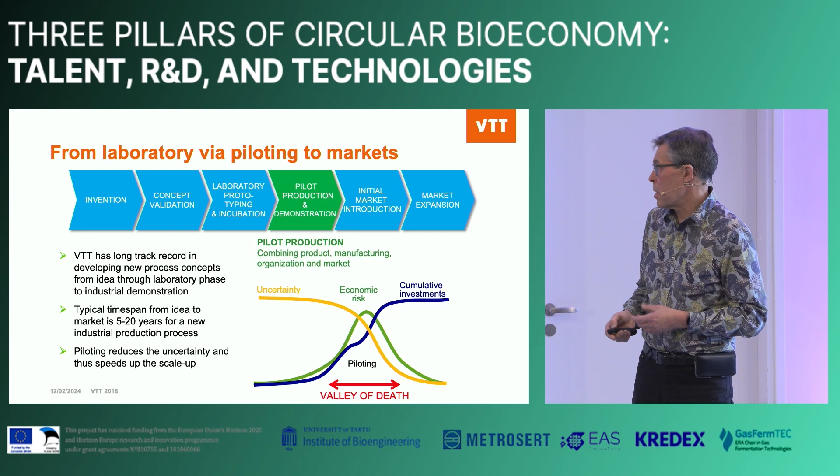First, I'm talking about gasification-based processes. Just to give you a short idea about gasification, it's combustion in understoichiometric air. So we put in air, steam or oxygen, and the aim is to have a gas that contains carbon monoxide and hydrogen, which can then be used for synthesis or gas combustion in engines or turbines for energy production, but quite recently for chemicals. That's shortly about gasification.

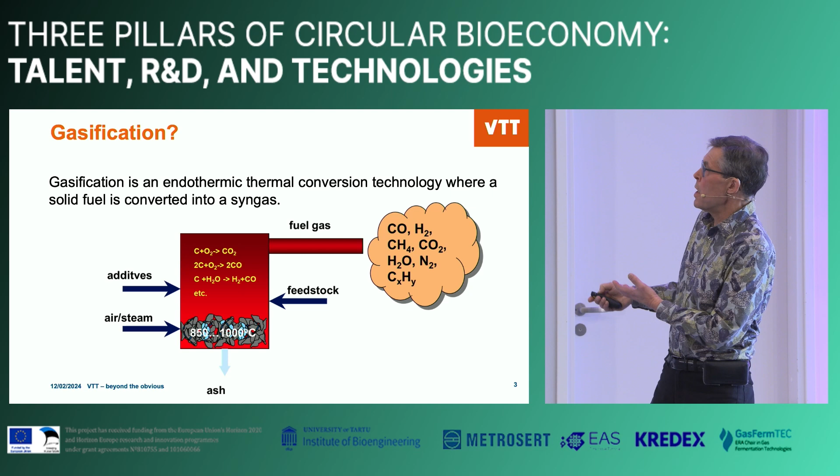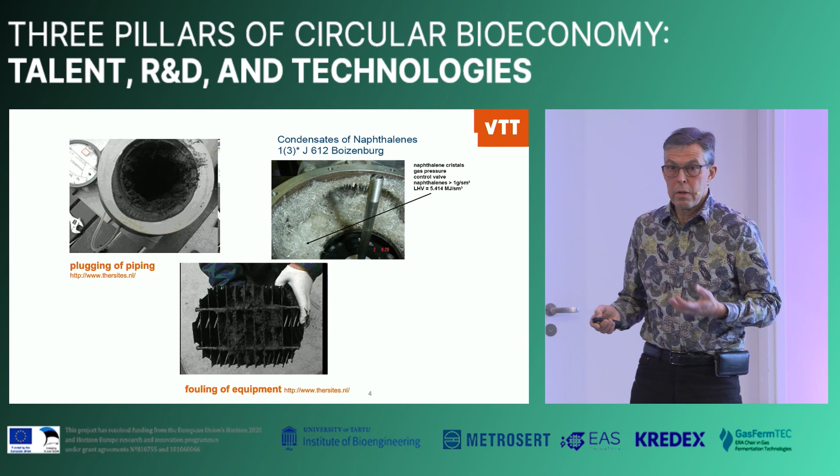This looks nice, but the problem is here, the compounds that make the gas very dirty, so tars, causing a lot of problems in downstream piping. So that has been the main goal, to treat the tars. You can wash them, but there are also other means. And one of the first questions when we started this work in '85 was what are the means, and could we do it by catalytic cleaning of the gas.

And the challenges are really that the gas contains a lot of impurities in addition to the main components. We should remove all this and have a catalyst lifetime over 2 years, and have a catalyst that tolerates poisoning and deals nicely with process interruptions and so on. We started this in the late 80s by screening catalysts after a literature survey, what catalysts are good, and making also our own judgment.

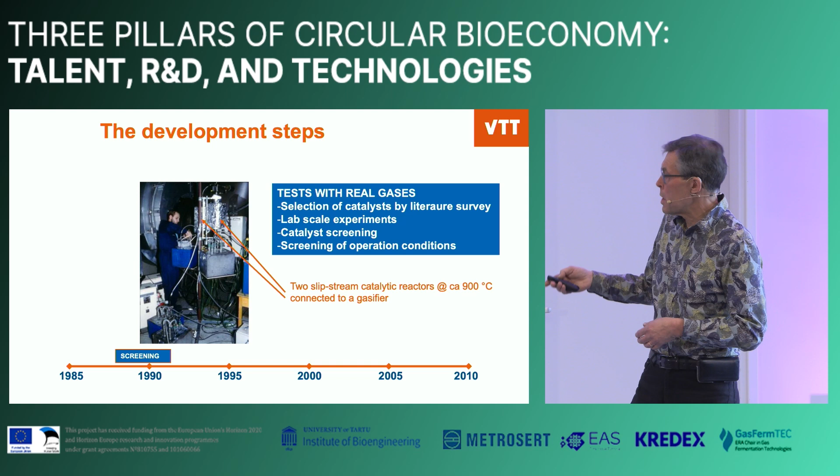And we started with real gases. We made a selection not to do it in the lab, but in a real environment, to get an idea about how it works in practice. It was a little bit tedious, but later it showed that it was a really good choice. So we had a test unit in a gasification plant, we traveled there and made the measurements, and found out that there is a group of catalysts. Here is the tar content, and nickel catalysts work very well in this environment. And the problem seemed to be almost solved.

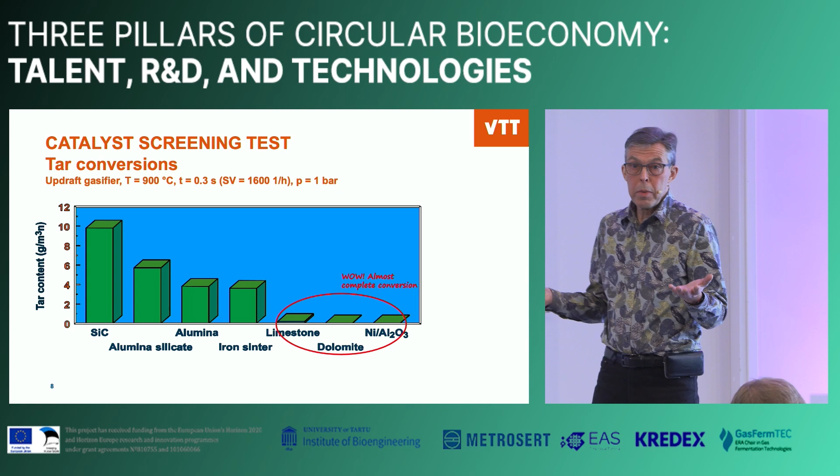Fine. The next question was, when this was lab scale, a 50 milliliter reactor, how to apply the catalyst in practice. The gas contains dust and all nasty things. And we ended up using a monolith catalyst. We tested it at a little bit larger scale, looked at the operational limits and also the fundamentals. What is the chemistry in this? Is it cracking, or reforming, or what is happening there? I did my doctoral thesis on this phase in the 90s.

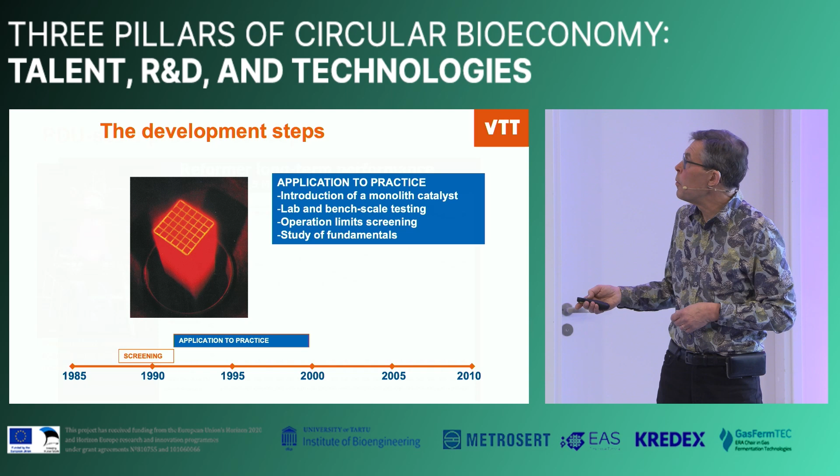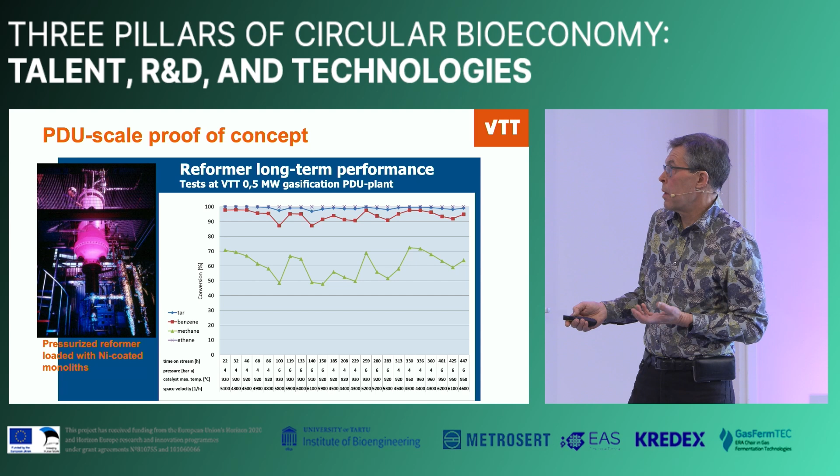This is an example, we already had quite a big one. It's a pressure vessel; actually, the reactor itself is not very big. What we did is we measured in series of test runs. This is time on stream, 500 hours, and the impurity levels of benzene and tars, showing that the conversion remained quite high. Looks really good. This works, and everything was quite positive. So the next step was to scale up to a little bit larger.

The units in gasification are very big, tens or hundreds of megawatts. So how do we do the scaling up? We did a lot of reactor testing with this two-stage reactor where the monoliths are here, with air introduction. This was already a several meter long unit, but still working in our pilot center at VTT.

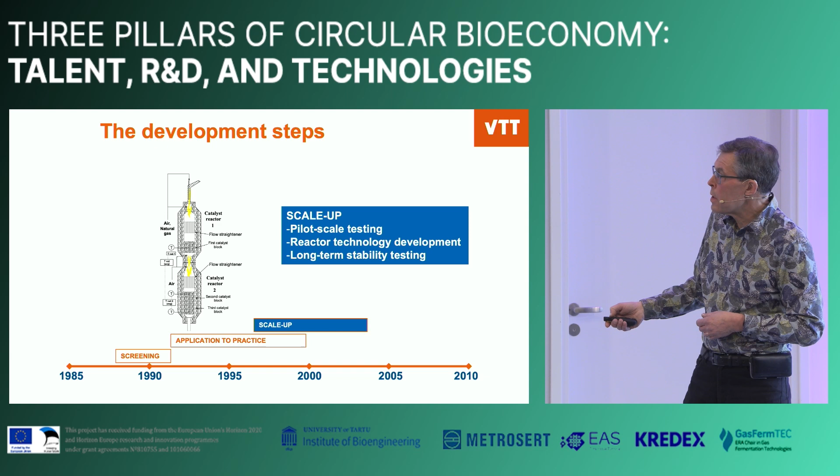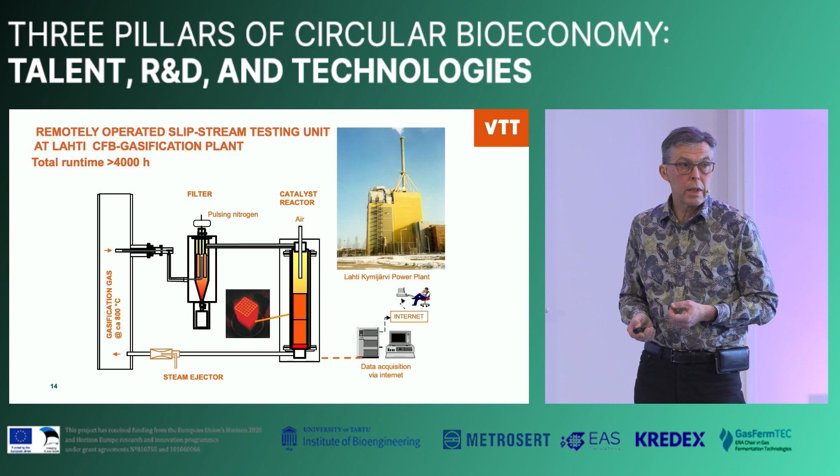Long-term stability testing is also one of the key issues. The catalyst lifetime should be in the range of several years. This was around 1995. To look for the long-term stability, we had a slipstream unit in Lahti. This graph shows a catalyst reactor that was automatically operating, and we were monitoring it through the internet to see how it operates. Over 4,000 operation hours were gained during 2 years of operation.

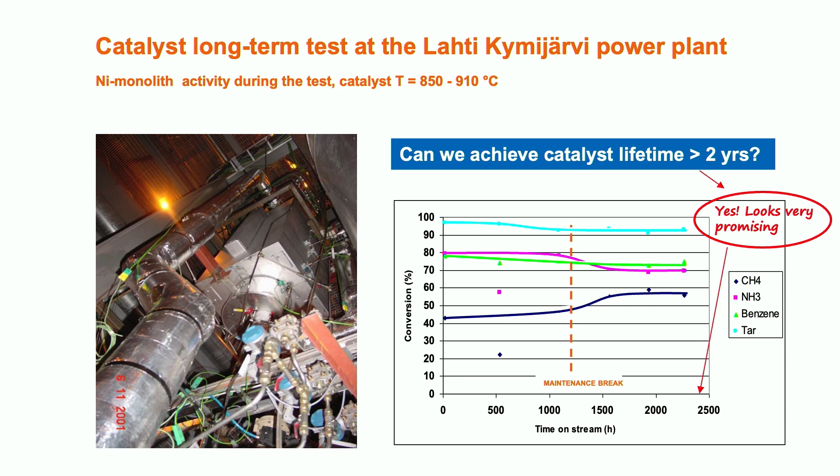This is an example of the unit. It was assembled there beside the gasifier, and it operated quite well.

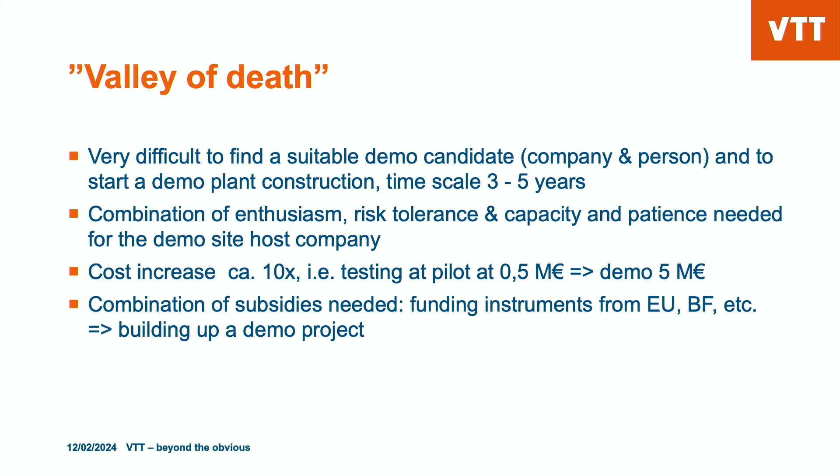Then everything was fine, and we entered the valley of death: where can we find a customer and site for an industrial-sized demo? This was tricky because it was actually quite difficult to find a demo candidate - a CEO or technical manager who is enthusiastic, and a company willing to take the risk and invest in this kind of project. So a combination of enthusiasm, risk tolerance, capacity, and patience is needed from the company.

It was really hard to go. The power plant size is 5 megawatts, and these are usually municipal authorities, so in addition to the company, you have to convince the town council about the sensibility of an investment of several million euros. The funding and cost increase is tenfold at least - from 500,000 euros you go to 5 to 10 million euros in a plant investment, which means subsidies are needed from EU, Business Finland, etc. Building up a demo project to support all the activities was also one of the tasks.

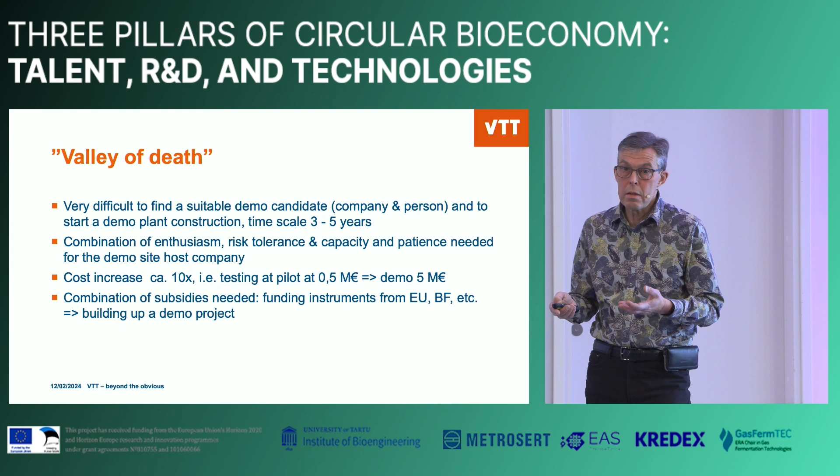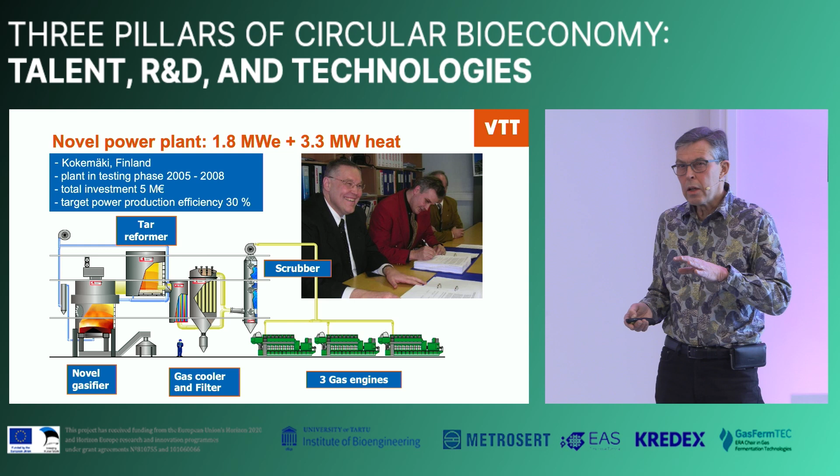This was the idea of the plant: 3 engines making power, with the gasifier, tar reformer, filters and scrubbers and so on. It cost about 5 million euros with a production efficiency of 30%. That was in 2005 when we started to construct the unit.

Here is the site. The reformer is actually this green one being installed in the unit, and there was also reactor technology development taking place on site at the same time.

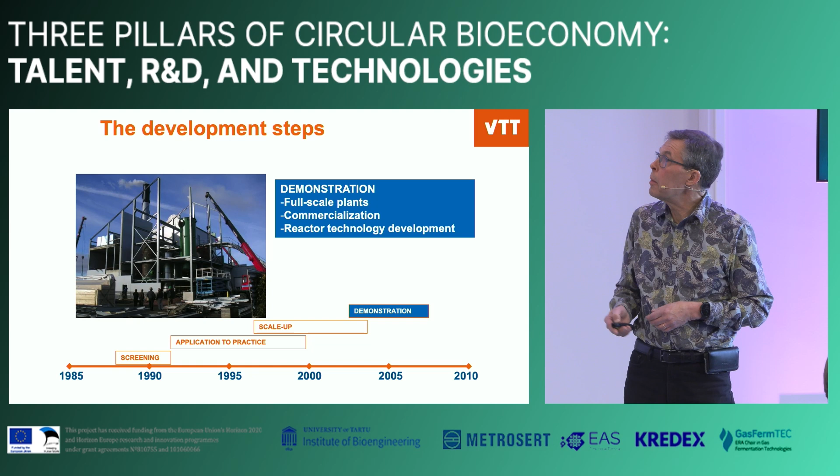At the same time as this Kokemäki plant, in Skive, Denmark there was quite a similar plant with a different background - another Finnish company was also selling our technology, and it was built in 2005. There were much bigger muscles behind it: the Department of Energy of the United States, the Danish Ministry of Energy, and also EU and municipalities. It was a much better organized project, and the Skive plant is working today, but the Kokemäki plant failed within a few years.

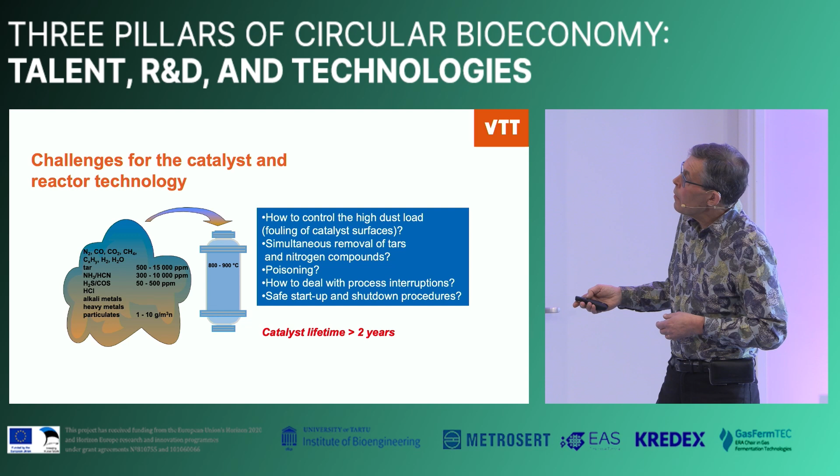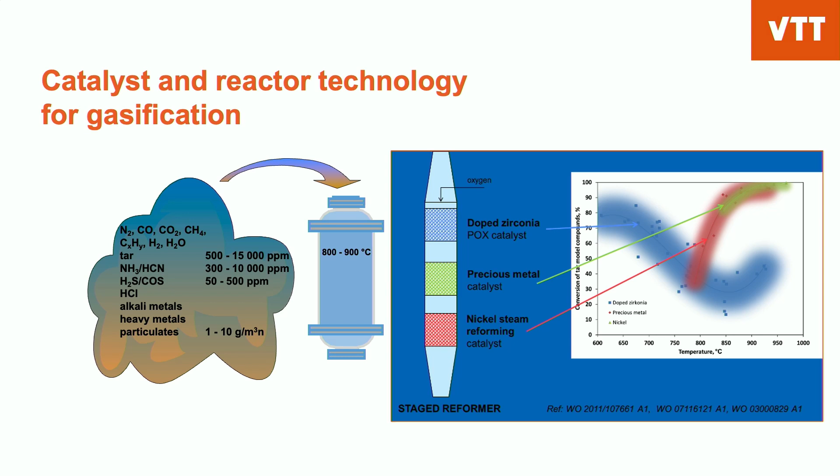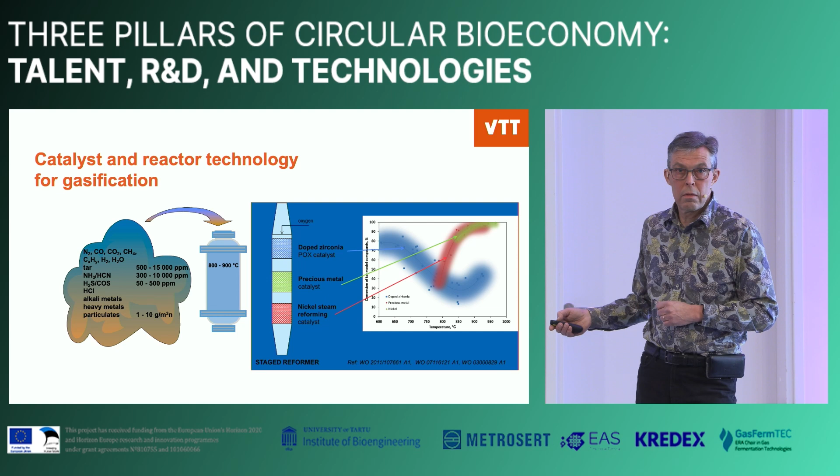Here is the technology that was constructed: a 3-phase catalytic reactor, where there are actually several reactors packed into one reactor. That was the end result of the work, and this was utilized later, as you will soon see.

The story continues. The Kokemäki case failed because it was a really short period of time that was possible to operate there, and also the project was dimensioned wrongly, so it was too ambitious, and it was tuned to a really ambitious schedule, and it didn't work that way. So after a couple of years of testing, we were almost at the end, but it was failing because we couldn't get it operating within the budget.

The Skive plant had a lot of monetary resources, and it went much nicer way. And so, however, the story continues.

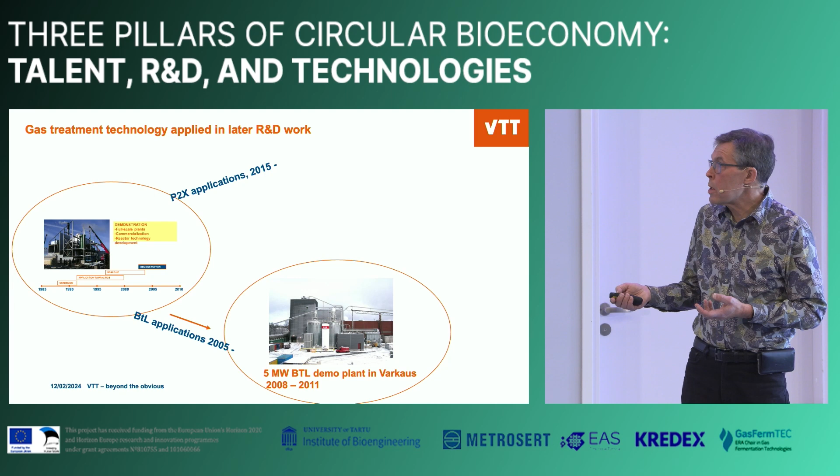As a second phase, there was the biomass-to-liquid demo plant. So the same technology that was used here can be used to make biodiesel. There was a 2008 to 2011 Neste Stora Enso joint operation project, the aim of which was to produce, in a very large plant, 300 megawatts of biodiesel from wood, in connection to a pulp mill. So that was a really big target there.

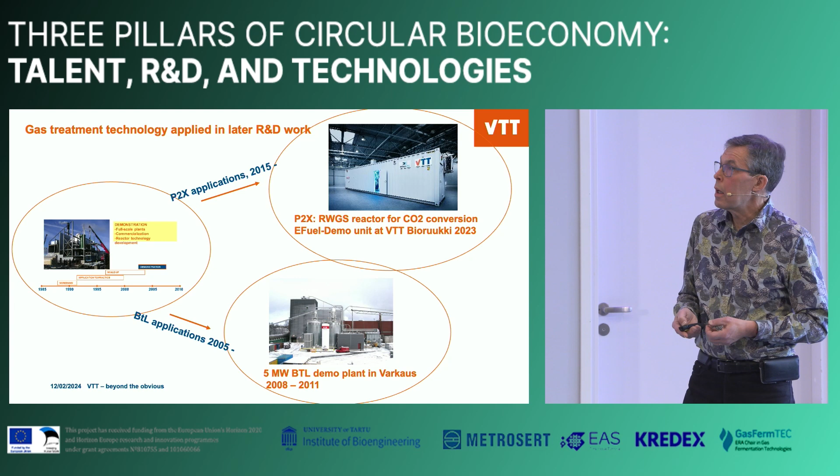And the second thing, what I'm working on quite recently, very much right now, is power-to-X applications. So the same technology can be used for carbon dioxide utilization for fuels and chemicals. But at that time, the target was really on very big plants, oxygen-blown, but there still aren't, after 10, 15 years of development, any such plants.

In this kind of case, there are very high economic challenges of a first-of-a-kind plant. So investment is typically 50% higher. A 100,000 tons per year plant will require 500 to 1,000 million euro investment. And so there is a very big risk involved.

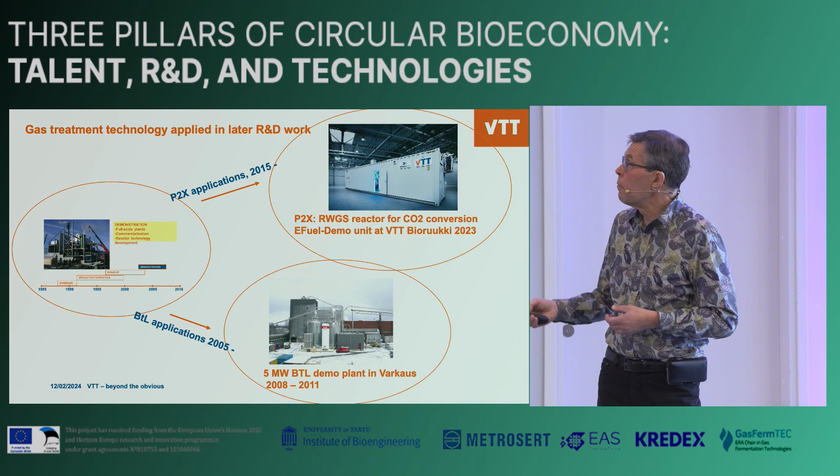There's also risk in showing this kind of slide, and political uncertainties are one of the issues related to all biomass and bio-based processes, and that has been one of the issues we've been struggling with.

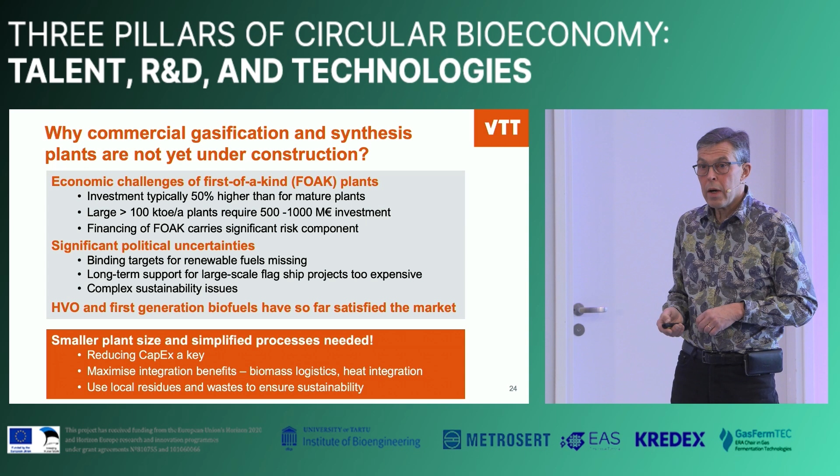So what we concluded was that we have to make the plant size smaller, and improve the economics by simplifying it. One of the ideas was to have 30 megawatt to 150 megawatt plant sizes and use a numerous amount of these plants that feed a central refinery with feedstock, and then we can make jet fuel or maritime fuel.

And like in the COMSYN project, we had a target of 0.8 euros per liter of diesel price, and all the piloting test was done. You can see on the project site it was ended some years ago, and so technically the concept seems ready.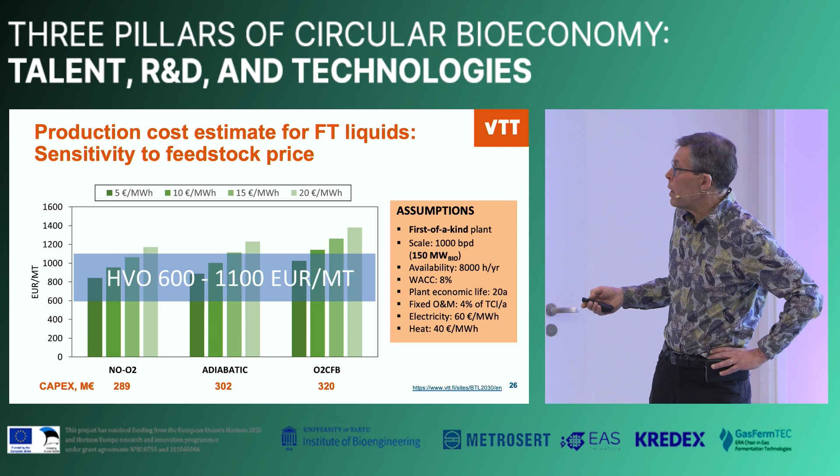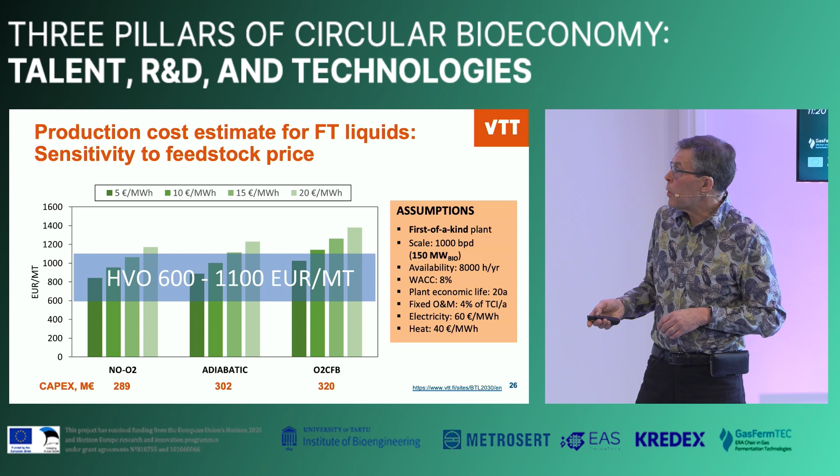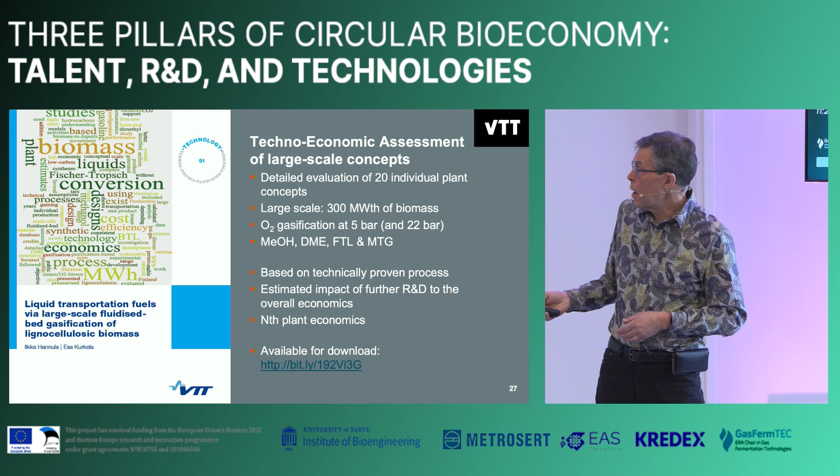Here is the price of the fuel for different concepts, and the HVO target or price is here, so we should get to the same level with these costs. That's based very often on Aspen models, but in simple cases, Excel sheets. It's a really important tool, and my colleagues have been publishing a lot on this. If you're interested, there are a lot of publications on techno-economics of gasification-based plants.

So, lessons learned. In the initial, early phase, when you are starting the project, it was a good choice to make the test in a real environment, because then we found out what the real problem was. It was sulfur, the biggest or trickiest poison, and also dust. We realized these kinds of problems, which led us to conclude that we need a kind of monolith-type structure in the industrial scale plant.

In pilot scale, techno-economic life cycle analysis is very important, along with reactor concept studies and reactor modeling, flow modeling of how you really construct the system, and also studying long-lasting phenomena like corrosion and poisoning, and that sort of thing.

And at full scale, like the Kokemäki case, it failed because of an ambitious schedule. First-time, not-yet-tested units were connected together, and when they fail, one after another, it's very tricky to fix: first the feeding, then the gasifier, then the reformer. It's better to do it phased, even if it's longer and more expensive, just to really cut it into pieces and do it that way.

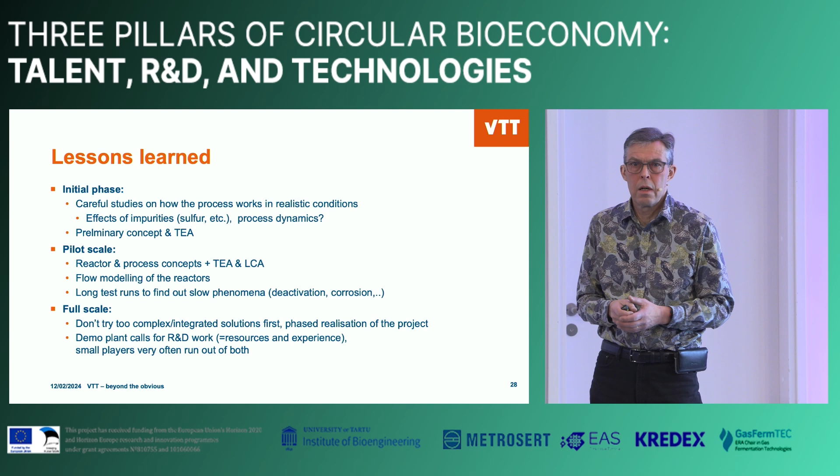The Danish site was done in a quite similar way, but they had a much higher budget and more time for doing that. Also, a demo plant calls for a lot of R&D work, which this kind of small company runs with just a few persons, and they usually don't have the support for that. So it's also an issue that resources and experience are really needed. It's not just the enthusiasm, but that helps a lot — though resources are also very important, and small players very often run out of that.

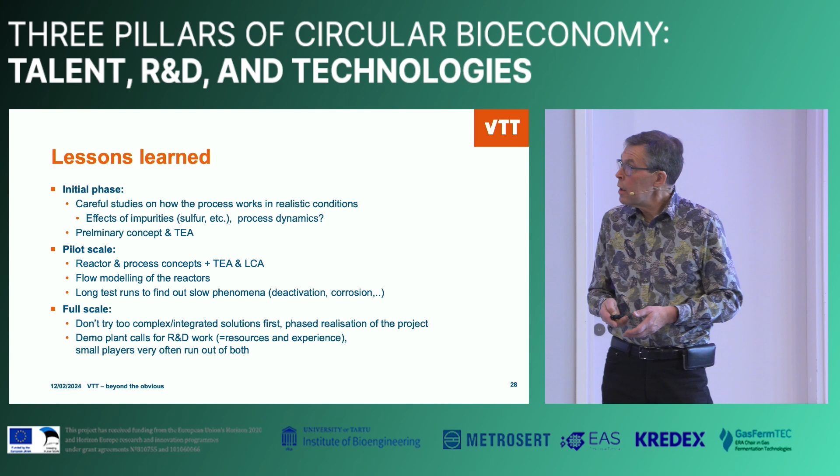So, thank you for your attention.